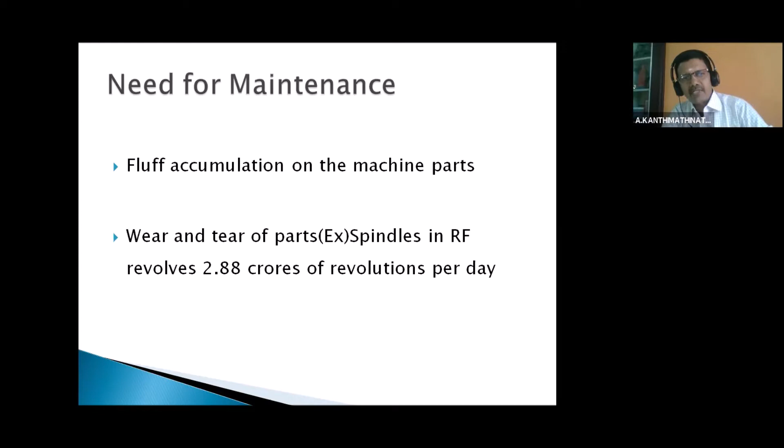For example, a spindle in a ring frame on average revolves more than 2.88 crore revolutions per day. Likewise, the tin roller shaft revolves 21 lakh revolutions per day. Without timely replacement of oil and grease, how can we expect the spindle or tin roller shaft to perform better or without wear and tear?

Likewise, less illuminated areas due to dirt deposits in the sensors and the cameras in contamination clearers will affect the clearing efficiency of these units.

Abnormal heat develops due to dirt accumulation, for example in beater shafts in a blow room. Abnormal energy consumption is created due to hot spots in ring frame motors, and also due to misalignments in ring frame variators.

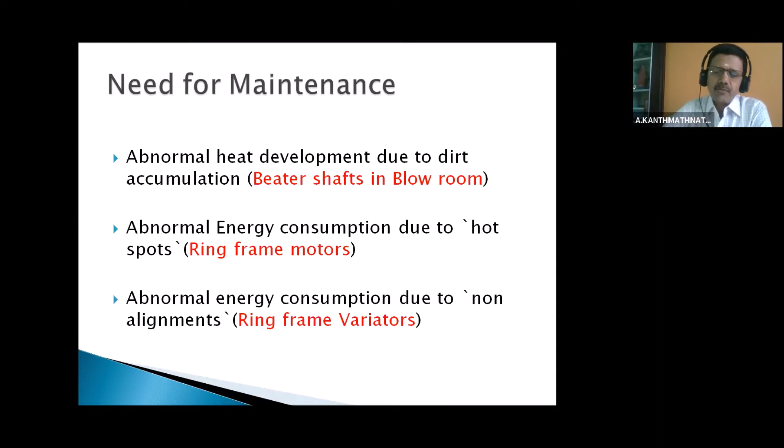All this happens when there is no maintenance. Absence of maintenance results in deterioration of quality, like rise in imperfections or weak places. There is a possibility of drop in production if travelers are not changed in time, possibility of loss in utilization if there is a breakdown, and higher energy consumption when there are hot spots in motor parts.

Why do we say higher maintenance expenditure? For example, if a bearing is not replaced in time, it will eventually wear out. Along with the bearing, you will be replacing the shaft and the housing also. The expenses become threefold instead of a single replacement. So higher maintenance expenditure finally leads to substandard performance.

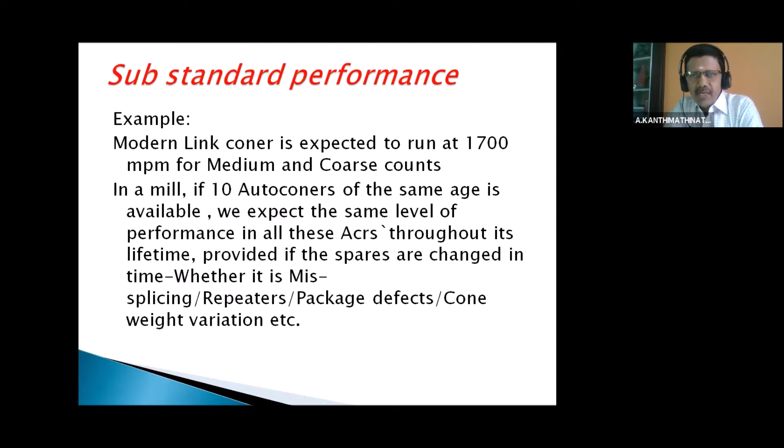What do we mean by substandard performance? If you take an autoconer in any spinning mill, we expect it to run at 1700 meters per minute for medium and coarse counts. Let's assume we have 10 autoconers of the same age. If parts are replaced in time as per the maintenance schedule, we expect all autoconers to perform at the same level. But is this happening in all mills?

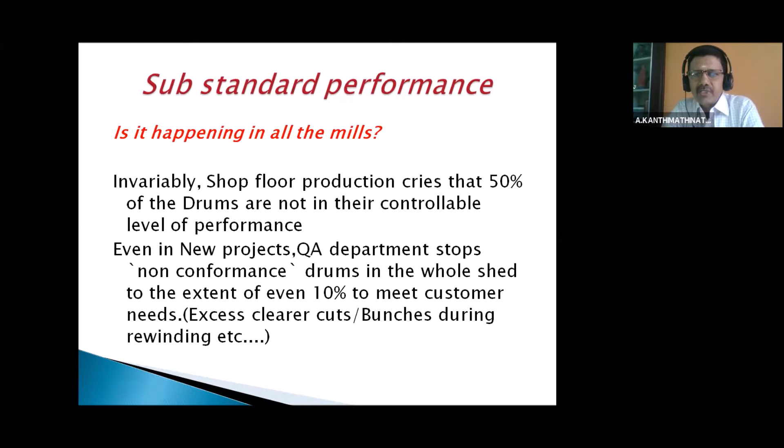Invariably, shop floor production complains that 50% of the drums are not at their controllable level of production. Likewise, even in new projects, QAD stops more than 10% of the drums to meet customer expectations.

Why is this so? The causes can be many, but it is mainly attributed to paying less attention to the needs of the machines, especially replacement, lubrication, or routine cleaning. We also have less knowledge about the machine's requirements, and very few trained crew for attending to them. Finally, it leads to improper maintenance of machinery and its components.

Last but not least, and more important, there is an absence of coordination between the three pillars of manufacturing: production, maintenance, and quality at the shop floor level.

There is an absence of data, absence of review of performance, absence of adequate knowledge to maintain, and non-availability of benchmark levels. We don't know the benchmark levels of performance of an autoconer, a ring frame, or a draw frame. If we take an auto leveler draw frame, we expect 0.5 to 1 meter CV at any point of time. Likewise, we should know where we stand against the benchmark levels of performance.

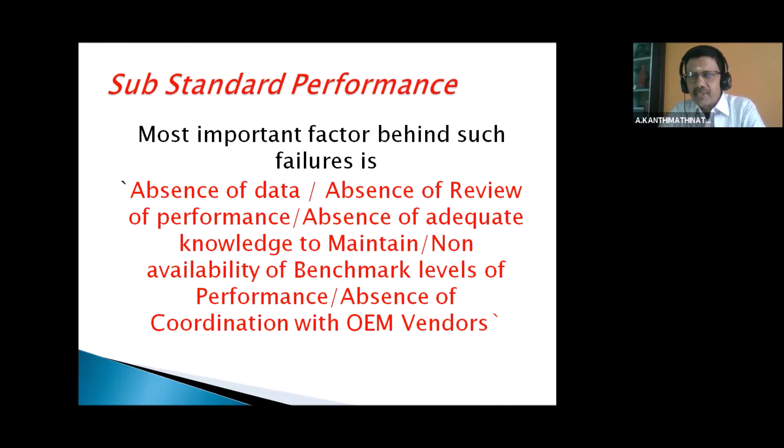And lastly, there is an absence of coordination with OEM vendors. OEM vendors are there to guide us and help us in times of difficulties, but normally we don't coordinate with them.

Now we will look into the evolution of maintenance, which is the topic of this presentation. Let's start with the first generation maintenance, the period of 1940 to 1955. In this period, they allow the machine to run until it fails, and the problem is identified only after leading to a breakdown.

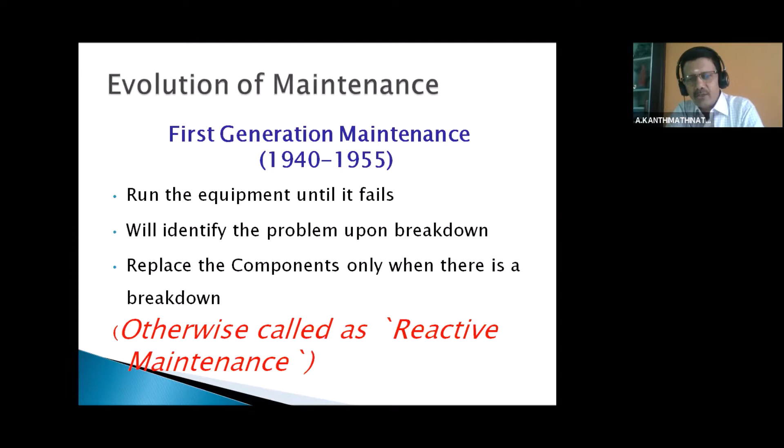Then components are changed only after breakdown. So we normally call this breakdown maintenance, or reactive maintenance, because we are reacting to the incident.

Examples: a tin roller shaft broken in a ring frame, or a differential gear failure in a speed frame. The OEM vendor will be called for inspection, after which spares will be ordered. Upon receipt of the material, the OEM vendor will attend and rectify it. So what is the end result? No one knows when the machine will be restarted.

The best example of this first generation maintenance still happening today is in our ginneries. Double roller gins in Indian ginneries follow this primitive practice even today, which is the root cause for quality inconsistency in our Indian cotton.

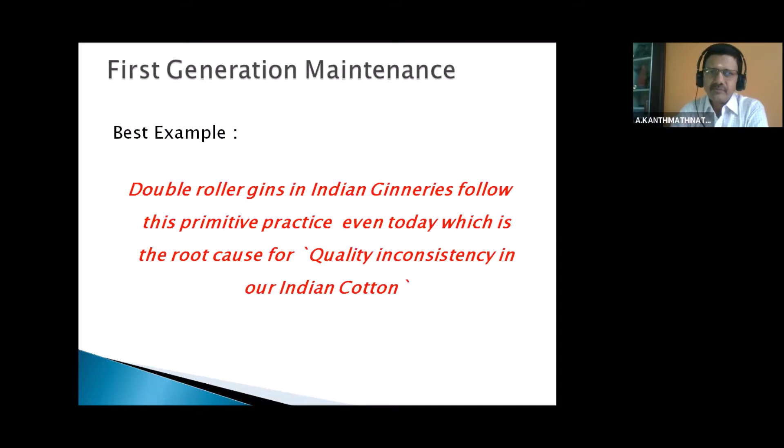So what are the disadvantages of first generation maintenance? Sudden utilization drop of the unit, because no one knows when the breakdown will happen. Surprises to customers, because we don't know when the machine will be restarted or when we can commit to production delivery. Stress in shop floor management, because there will be a quarrel between production and marketing people. There is no fixed time to repair, since we don't know when the OEM vendor will come or when spares will arrive, and there is no room for forecasting the next activity.

Nobody knows what is the next activity for this machine, because we don't know when the machine will be restarted at all. But there is a very good advantage for this program. There need not be any budget for regular maintenance. Management is very happy on that.

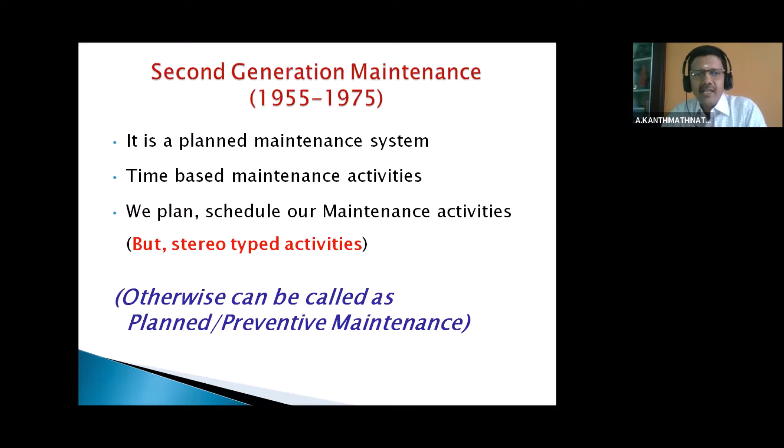Now coming to the second generation maintenance. This period is 1955 to 1975. This is a planned maintenance system, time-based maintenance activities. We plan, we schedule our maintenance activities. But please note, these are all stereotyped activities. Routine machine cleaning, if we fix that ring frame once in 15 days, it will be stereotyped. Once in every 15 days, ring frame number one will go for cleaning. Likewise, we can call it planned and preventive maintenance.

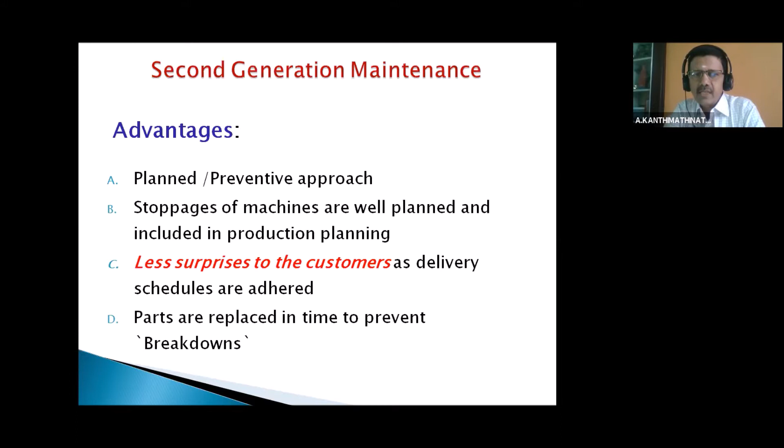Advantages: it's a planned and preventive approach. We take preventive steps to control the breakdown. Stoppages of machines are well planned and included in our production planning itself. At the beginning of the month, the stoppages of ring frames are well planned for maintenance, and the production manager subtracts that portion from the production calculation. We give less surprises to the customers as delivery schedules are adhered to. Parts are replaced in time to prevent breakdowns.

But there is a requirement for second generation maintenance. We should have a planning schedule, a schedule of maintenance activities, and we should control and monitor through our ledgers and records. And we should also review the maintenance activities and their impact.

What do you mean by review of activities? For example, if you do the buffing activity, what should be done? If the buffing is not proper, it will lead to a rise in imperfections. So buffing activity should be checked or reviewed by running the cops in an auto coner clearer and checking for any rise in imperfections. Based on that, the quality of buffing will be reviewed. Like that, for every activity, we should have a system of review of maintenance activities.

We should also have OEM recommendations on lifespan of machinery, lifespan of critical parts, and the lubrication and maintenance schedule. For example, Lakshmi Machine Works will give a schedule of card wire replacement. Cylinder wire should be replaced once in 1000 tons. Rings should be replaced in a ring frame once in 5 years, like that. Likewise, the comber oil changes: every 6 months it should be topped up, every 2 years it should be replaced, like that. OEM recommends for the lubrication also.

We should follow that, and we should also have a skilled and competent maintenance group for taking up the second generation maintenance. We also work with budgets, both regular budget and replacement budget, so management can plan the expenditure for every month. So the second generation maintenance examples are routine maintenance cleaning, machine cleaning, lubrication schedules, resetting of machines, grinding of card wires, top roller cots buffing, spindle centering, CMRS, concentric movement of rings to spindles, and also replacement of critical parts.

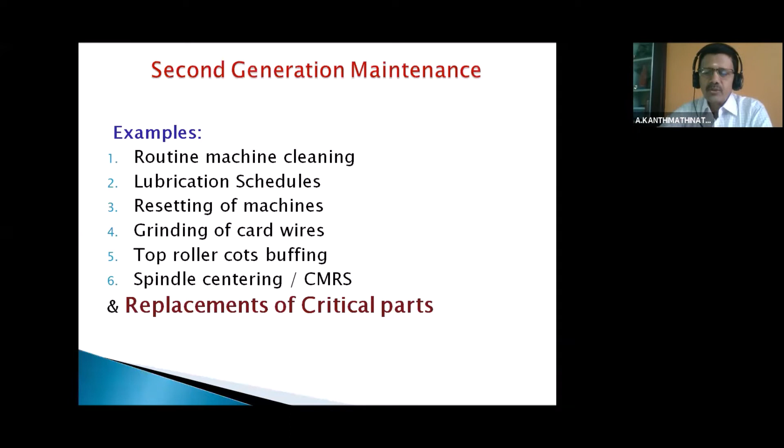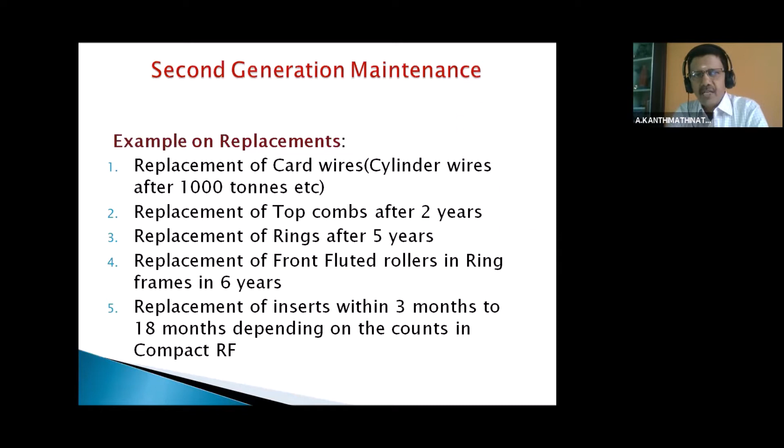What are the examples for replacements? Replacement of card wires, replacement of top combs in a comber after 2 years, replacement of rings after 5 years in a ring frame, replacement of front bottom rollers in ring frames once in 6 years, replacement of inserts within 3 months to 18 months depending on the counts in compact ring frame. These are a few examples of replacements.

What are the advantages of second generation maintenance? It is a well-planned systematic activity. Budgets and control facilitate financial planning for the top management. There are no surprises for the top management. OEM vendors are freed from surprise calls from the mills. Production schedules are met by us. Yarn quality is as planned and agreed for the approved maintenance program.

Please note, yarn quality is as planned only, as planned. For the given maintenance program, for the given replacement program, we can assure this quality. So we are committing to the management as well as the customer that the quality also will be as planned.

OEM vendors, what is the role of OEM vendors? Their role is limited to the maintenance instruction manual, where they give lubrication schedule, maintenance instructions, and the care to be taken for the electrical and electronic parts. Interaction between the cross-functional team in shop floor, production, quality, and maintenance is almost nil, because it is also a stereotyped activity only, and everyone lives in their own islands.

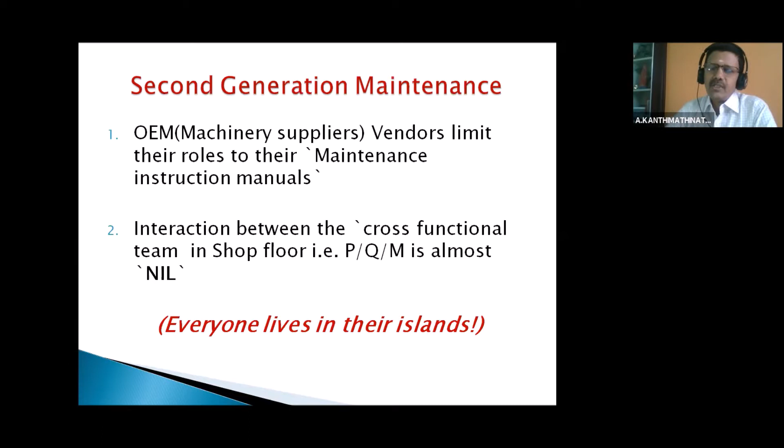In the second generation maintenance, people felt we want to improve the coordination between production, maintenance, and quality on the shop floor. That is why these concepts are generated: total productive maintenance, FMEA (failure mode effect analysis), 5S shop floor excellence, and process and maintenance audit system.

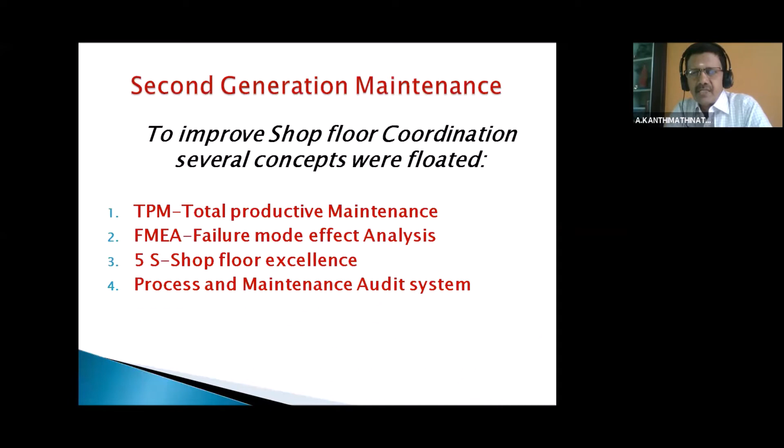What is total productive maintenance system? TPM helps to improve machine design, machine performance, and also the systems in the spinning mills to improve utilization of machinery, increase productivity in kilogram per hour or units per kilogram, and also helps create a safer environment with fail-safe gadgets, in Japanese words called a Pokayoke system. It also helps improve quality and performance of the machines.

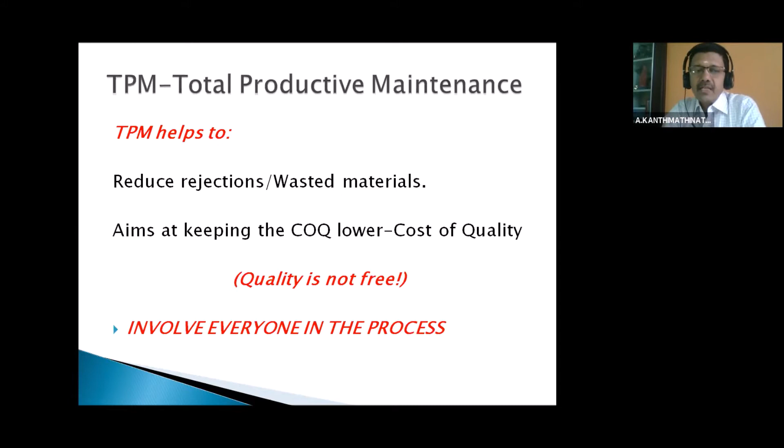TPM also helps reduce rejections and wasted materials in the process. It also aims at keeping the cost of quality lower, meaning manufacturing cost has to be improved, because quality is not free. Just to meet customer requirements, we cannot take the comber noil or flat strips for granted; we have to be very careful of the cost of quality also.

TPM mainly involves everyone in the total process. Main objectives of TPM, in simple words, we can say we are aiming at 0 defects, 0 breakdowns, 0 loss, 0 accidents, and 0 complaints, whether internal or external.

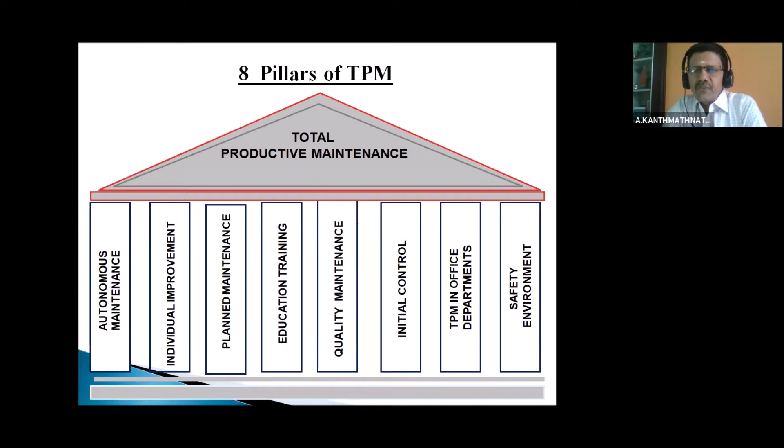So TPM has 8 pillars. What are the 8 pillars? Autonomous maintenance, individual improvement, planned maintenance, education and training, quality maintenance, initial control, office TPM, and safety, health and environment pillar. There are Japanese words for some of the pillars also.

Autonomous maintenance is Jishu Hosen, the JH pillar. Focused improvement is Kobetsu Kaizen, the KK pillar. Planned maintenance is Keikaku Hozen, the KH pillar. Quality maintenance is Quality Hozen, the QH pillar.

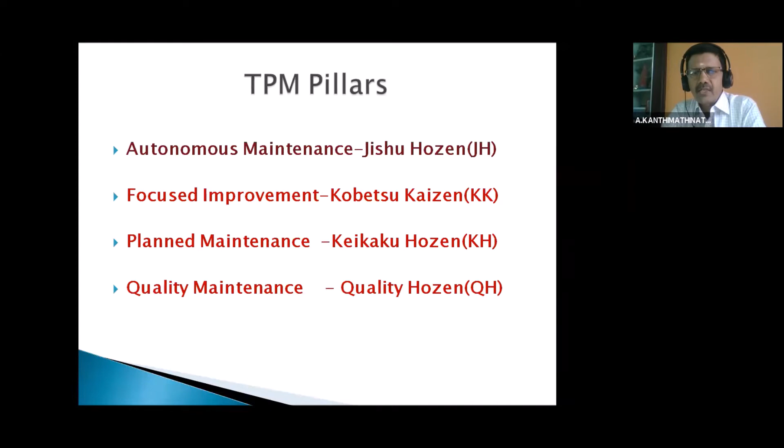Let us see what is done in autonomous maintenance. We will be selecting a machine and then doing an initial cleaning and inspection. Whenever we do cleaning, we always focus on inspection of the machine parts also, trying to locate the origin of defects.

Then we develop tentative standards for every parameter. After that, we follow the general inspection procedure, and also make it autonomous maintenance so that visibility of the parts is improved. Once it is all done, we standardize our operational procedures, and then it becomes autonomous management, where operators will be ready to handle the entire maintenance operation.

For example, some machine will be taken as a model machine and a model team will be formulated. The model machine will be inspected, and we will follow steps 1, 2, 3 as discussed previously. Once completed, we will deploy to other machines.

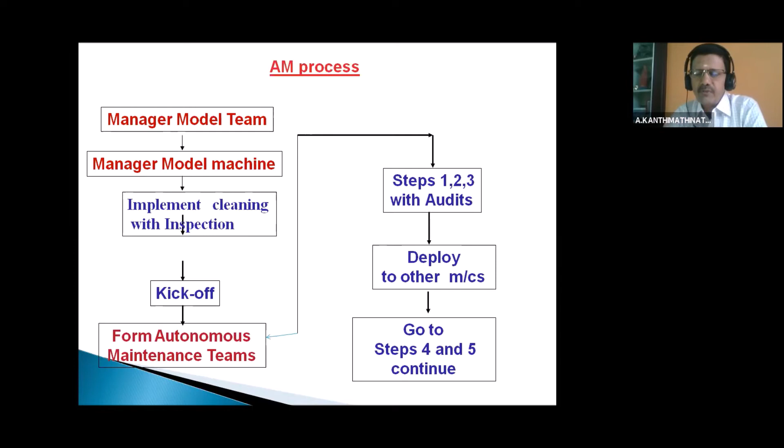For example, if card 1 is selected as a model machine, after completing the SOP, we will implement it in all 24 cards in the department. So every department will go ahead, following with the autonomous maintenance teams. The objective of autonomous maintenance is to make the operator an expert of the equipment and become manager of the equipment.

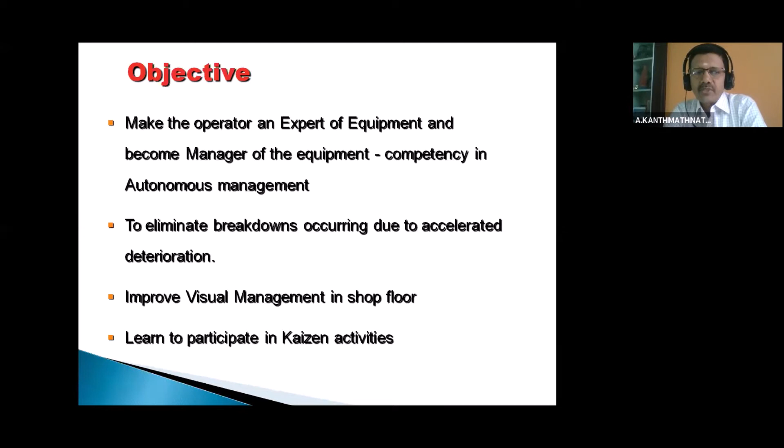He should have competency in autonomous management of the machine. We also try to eliminate breakdowns occurring due to accelerated deterioration, because we are not allowing dust deposits or worn-out parts due to absence of lubrication. We also try to improve visual management on the shop floor, and push operators to learn to participate in Kaizen activities.

What is Kaizen? You can break the word into two parts: Kai stands for small, Zen stands for improvement. Kaizen means small improvements. You might have seen the Maruti Zen vehicle. Maruti is a small vehicle, and Maruti Zen is a small improvement over the Maruti 800. That is why the vehicle is called Zen, a Japanese term meaning a small improvement over the Maruti 800.

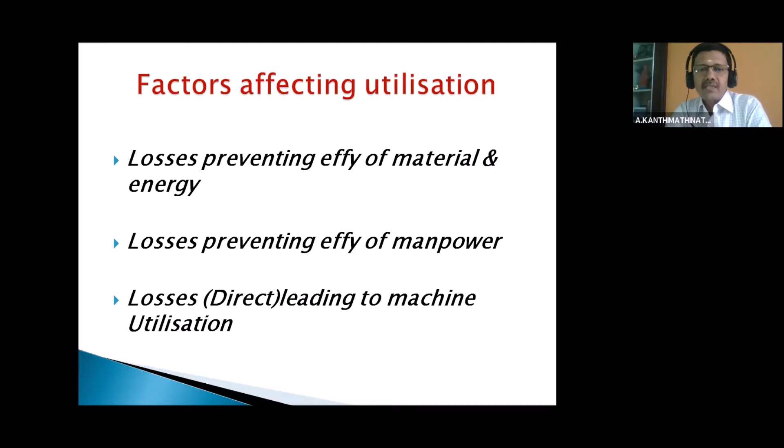Now coming to individual improvement, the KK pillar. Here the pillar focuses on utilization improvement, by reduction of losses and human-related downtime. The main focus is to reduce manufacturing cost due to utilization loss. What are the factors affecting utilization loss? Losses preventing efficiency of material and energy, losses preventing efficiency of manpower itself, and losses directly affecting machine utilization itself.

Here we coin a term called OEE, overall equipment efficiency. This is a simple multiplication factor of utilization, production efficiency, and also rejection, that is 100 minus reject percentage. For example, if your utilization is 97%, your production efficiency is 99%, and you have a 10% rejection, finally it will translate into 86.5 overall equipment efficiency. So this is one example. What is the expected OEE for a spinning mill?

99% utilization, 100% production efficiency, 100% quality efficiency. That means our OEE of a good spinning mill, where the TPM is in control, should be 99.

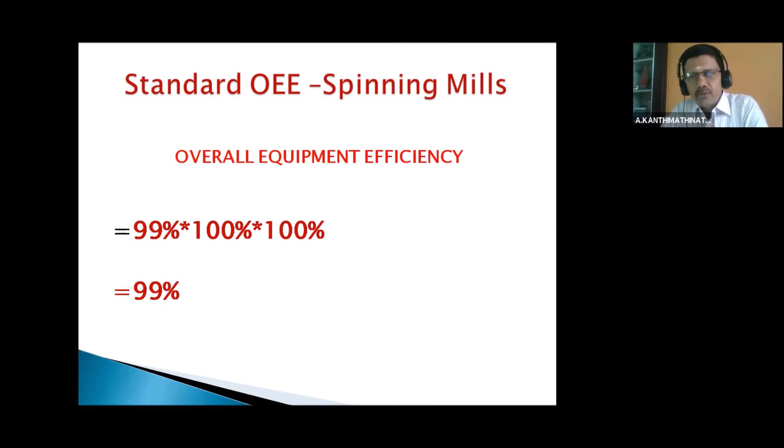Focused attempts should be made to eliminate or reduce all kinds of losses leading to utilization loss of every individual machine in a spinning mill through this pillar.

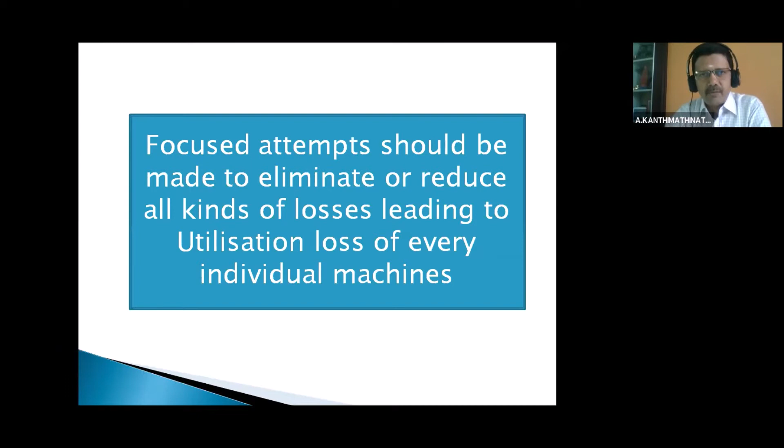The third pillar is planned maintenance. This planned maintenance is to improve the reliability of the equipment, whether we can rely on this machine as a good machine, whether it will continue to run, whether I can commit to the customer by relying on this machine. That is the aim of this planned maintenance.

Here there are 2 important terms, MTBF and MTTR. MTBF is mean time between failure, MTTR is mean time to repair. How are we achieving that? We are trying to achieve 0 equipment failures through establishing the basic condition of the machines.

So basic condition, what do you mean by basic condition? When the machines are sold, it comes with a certain condition. The same condition has to be maintained throughout its lifetime. That is called basic condition. So we should eliminate causes or factors for accelerated deterioration, and abolish environments causing accelerated deterioration.

For example, in a ring frame inverter, there is a cooling arrangement for the ring frame main drive inverter. If the inverter cooling arrangement is not working, the inverter fails within 24 hours. So you should maintain such kind of environments, abolish environments causing accelerated deterioration.

And you should correct design weakness and lengthen the life of any parts. For example, when Suessen gives a retrofitting for G5 for one ring frame in spinning mills, in many spinning mills, the front roller shaft immediately breaks down after the retrofitting.

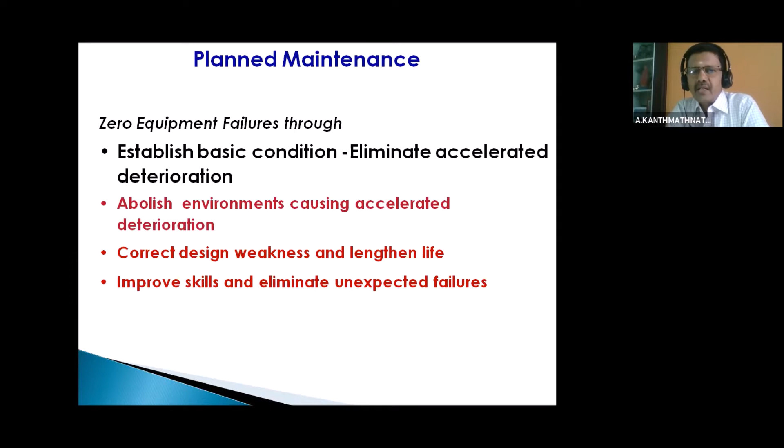The mean time between repair, MTBR. So we should study the time taken between the repairs in a particular machine. For example, in a ring frame variator failure in a particular ring frame. So any breakdown, it should be prolonged. Actually, there should be a time gap between the breakdowns.

There should not be any breakdown at all. If there is a breakdown, it should not recur so fast. So that should be studied between the frames.

For example, ring frame 1, if the mean time between repair is 6 months, that should be maintained in other frames also. If the second ring frame breaks down within 3 months, we should study and improve the condition there. So finally, the time taken for mean time between repairs should be extended so that the utilization loss is minimized. Likewise, mean time to repair.

This is one of the most important factors which I want to highlight also. In one spinning mill where TPM is implemented, there was a unilab breakdown in the day shift. That unilab was rectified immediately within half an hour. The same kind of breakdown repeated in the third shift in the same mill after 1 week's time. For the same repair, the mill took 3.5 hours.

So what do you mean by this 3.5 hours? Half an hour and 3.5 hours - there is a 7 times stoppage of the machine. So this has been studied by the mill in the TPM procedure.

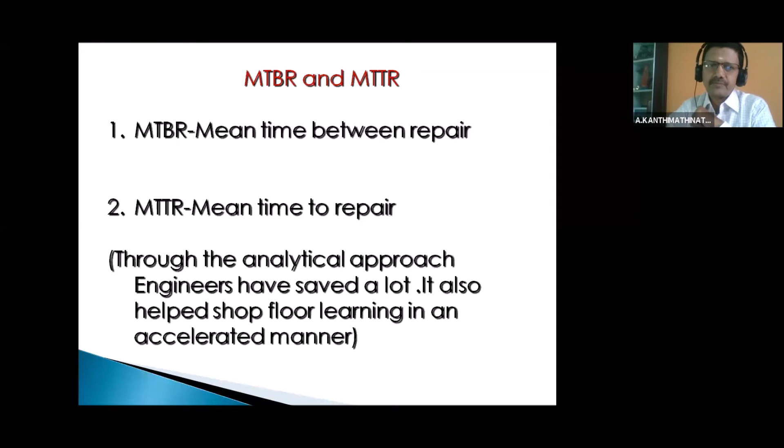Objectives of this education and training pillar, normally called the E&T pillar. Here we have to eliminate breakdowns due to poor skill or competence of the staff or maintenance crew, and to eliminate operator mistakes leading to customer complaints, defects and accidents.

In TPM based mills, customer complaint fabrics or cones will be taken to the work spot and discussed with the operators themselves, because operators are always with the machine and know how defects are being produced. So we should involve them, educate them, and get trained from them also. We should develop multi-skill in operatives, improve the skills of the maintenance personnel, and finally achieve zero non-conformance due to lack of skill. That is the aim of the education and training pillar.

The workers must be able to detect and eliminate abnormality by seeing the conditions itself, and they should be able to do Kaizen by making small suggestions, such as reducing cop rejection or reducing package defects. And we should develop multi-skill.

For example, today all the mills are going for individual spindle monitoring systems and also using e-bike. So operators must be able to read the content in a dashboard, reading the dashboard content in the e-bike also. So it's a multi-skill operation today. They should be educated on the computer display and act on that.

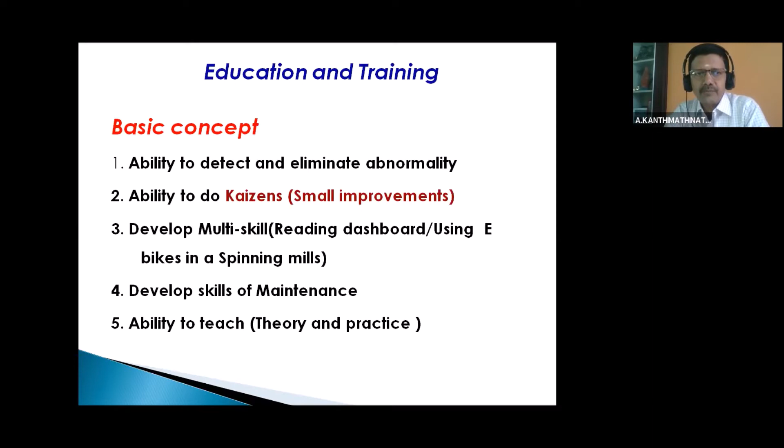Next comes the quality maintenance pillar, the fifth pillar. Here we are trying to simulate 100% inspection. Almost all of you will accept that 100% inspection of the product is not at all possible in a spinning mill, because every day some mills will be running with 25 tons of production. So it's not at all possible to spend time on that. However, we should try to simulate conditions of 100% inspection, like building quality into the products in the in-process. That is, we have to eliminate in-process defects.

For example, if the customer is very serious about plus 140% imperfections, then we should be very cautious on the Comber NEPS delivered in the sliver. Like that, you should set standards for the Comber NEPS itself for the customer requirements. And we should try to eliminate customer complaints of all sorts, whether internal or external. We should also aim at reducing cost of quality through elimination of defects and rework.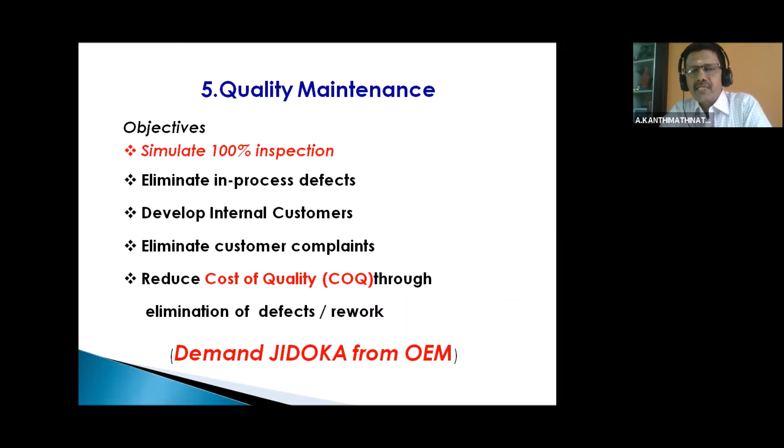And also we should demand JIDOKA from OEM vendors. What is JIDOKA? JIDOKA is nothing but automatic detection of errors and defects in the process. For example, seat belt alert in a car - if you don't wear a seat belt, it may lead to accidents, or rather, when the accident happens you will be affected more. So when the car is started it will give you an alarm signal, a seatbelt alert. This is called JIDOKA.

Likewise, alerts when handbrakes are not released while we start the machine. Likewise, slip spindles in an individual spindle monitoring system, because slip spindles lead to quality defects. Alarm generation in modern clearers when the clearer cuts are more or cop rejections are more. Alerts generated by individual spindle monitoring systems on broken spindles in a ring frame - these are all coming as JIDOKA. You should ask for JIDOKA from the OEM vendors.

How will we concentrate on ZDQC, zero defect quality control? You should concentrate on the origin of the quality defect. When you know the origin of the quality defect, you will establish material conditions yielding zero defects. How will you establish this? For example, you are working on contaminations in a fabric, so you will see that cotton is purchased with lesser contamination. So establish equipment conditions yielding zero defects.

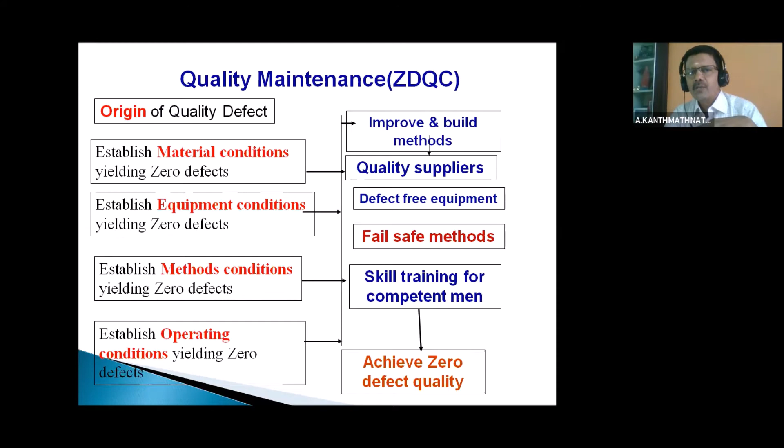Then establish methods conditions yielding zero defects - what are the methods? How do you clear the contamination, what methods are being followed by the worker? Then establish operating conditions yielding zero defects - what is the operating condition? Maintaining RH level in the autoconer section. If you don't keep 65% RH, your clearer is not going to function. So the operating conditions in the autoconer department has to be maintained like that. Based on this, we have to achieve zero defect quality.

Then comes our initial control activities.

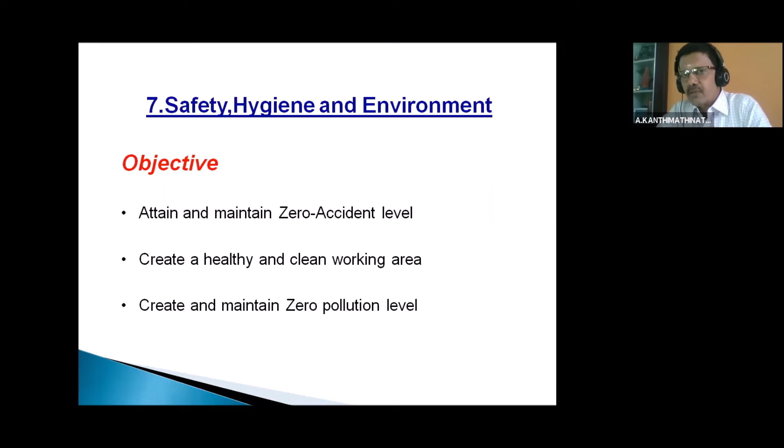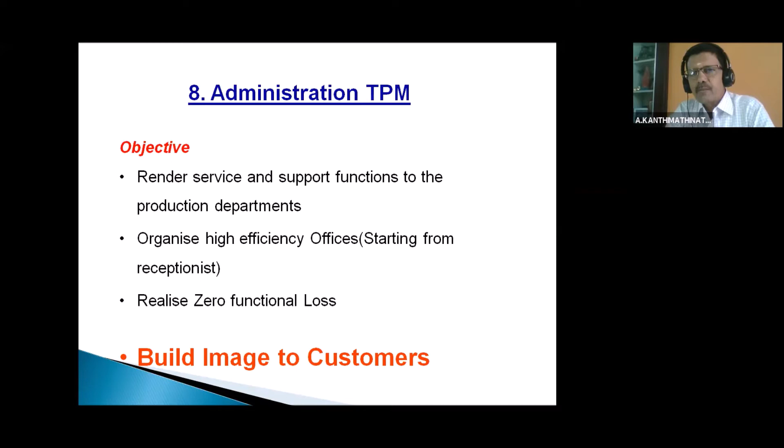Then comes the administration TPM. Administration TPM is being taken lightly in most of the mills, but it is more important because HR also comes under administration TPM, where 5S is a major part, and also the attendance, the time taken to pass the bills, time taken to receive a guest, everything, communication improvement. So if the administration TPM is not proper, the image at the customer level will be spoiled.

Benefits of TPM: total productive maintenance helps to maximize utilization efficiency, improve machine productivity, improve machine design, reduce rejects, and finally it helps to involve everyone from the operatives to the GM level.

Next technology concept is FMEA, failure mode effect analysis. FMEA was first coined by aerospace, used in 1960 itself. It was widely used by the automobile industry globally, first promoted by Ford at the global level. In 1990, the garment industry got attracted by FMEA and started introducing that. After that, spinning mills slowly followed the garment industry from the 1990s on FMEA.

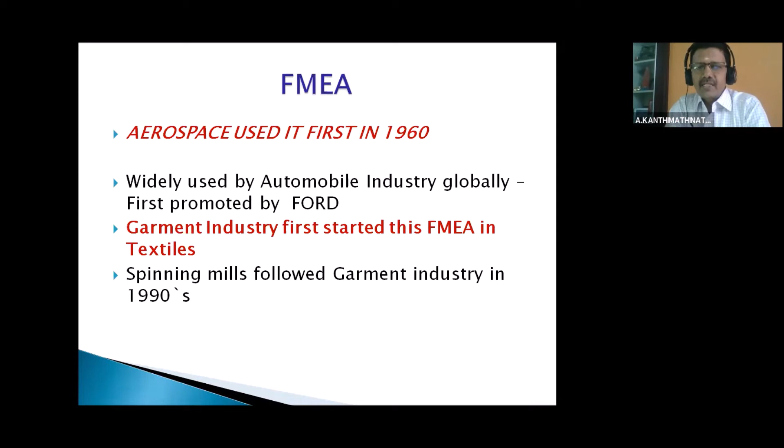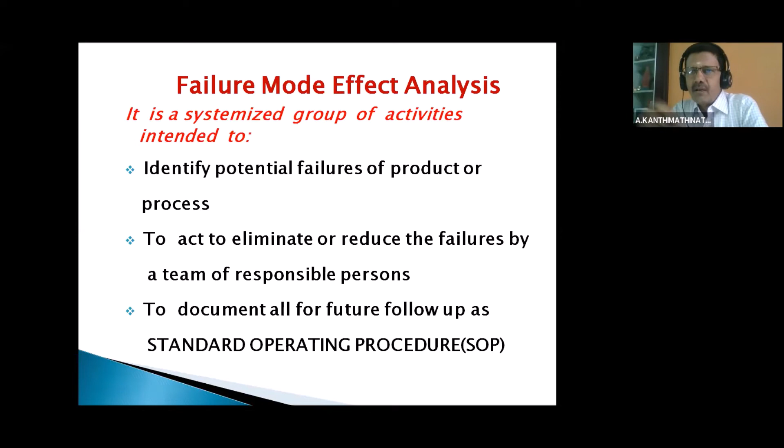What is FMEA? It is a systemized group of activities intended to identify the potential failures of a product or process, inherent in the process. Then we will have the responsible person act to eliminate or reduce the failures or the impact of failures, through a team of responsible persons. Finally, to document all these activities as standard operating procedures.

For example, we will take contamination in finished fabric. Customer has complained, their expectation is 0.5 contamination per 20 kg of fabric. So what are the things to be done? What are the data to be collected?

Contamination cotton, contamination picking efficiency by the operators, ejections per hour in a contamination cleaner in blow room, clearing efficiency in that machine, then autoconer settings per clearing, autoconer clearing efficiency, then contamination per kg in gray knitted fabric, contamination per kg in bleached fabric, and contamination per kg in dyed fabric. All this forms the data for the FMEA.

Then who are all the responsible persons for this? Since cotton contamination is to be noted, the procurement in-charge is responsible. Then the QA in-charge is responsible for contamination data in the department. The training in-charge is responsible for the methods in the contamination picking area. The maintenance in-charge is responsible for the contamination cleaner setting and the autoconer setting.

So all these persons will be called together to discuss this subject, and they will try to form a strategy to improve contamination clearing efficiency, and finally to reduce contamination in the final fabric. So they will implement the action, review the action taken, and go on reviewing the action by assessing the final finished fabric.

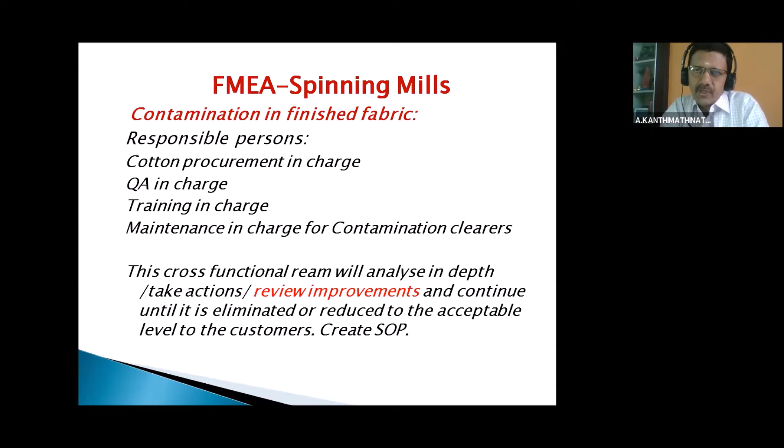Likewise, FMEA for process or design can be done in a spinning mill. The best example of design FMEA by OEM vendors with spinning mills is Contra flat tops by Lakshmi Card Clothing, and also the geometric conversion, normally called the short stitch conversion, for compact spinning by LMW. So you know the Contra tops.

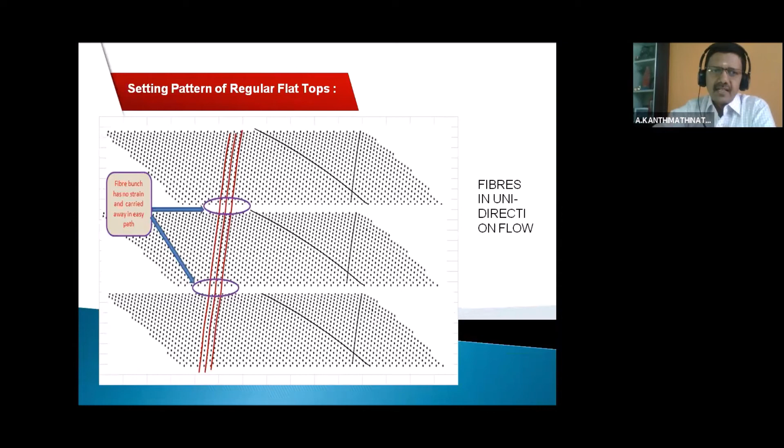In the normal flat tops, regular flat tops, fiber moves in a straight line.

Whereas in the Contra flat tops, fiber is allowed to move in a zigzag way by arranging the flats in a zigzag way. That is, right helix angle and left helix angle will be alternatively placed in the flat tops, so that it helps.

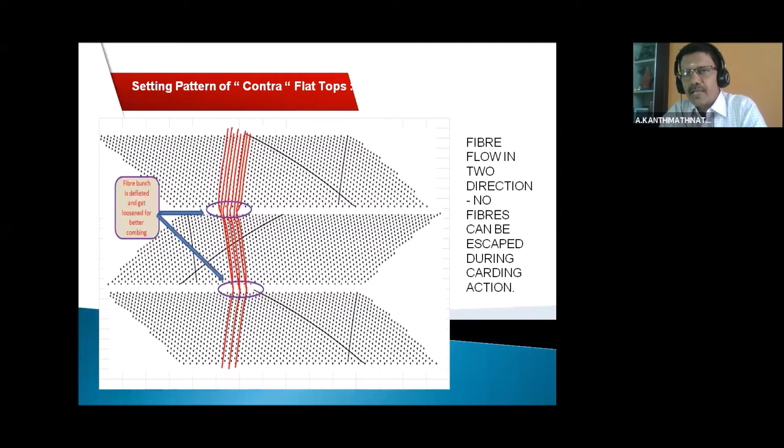What are the advantages? Enhanced fiber separation between cylinder and flat tops, significant reduction in sliver neps per gram. More importantly, you are saving minimum 0.5% raw material, maximum of 1%. So the flat tops will be paid back within a 3 month period. This is an advantage of design FMEA by LCC.

So in the FMEA, we also go by RPN, risk priority number, which is calculated from occurrence of the defect, severity of the defect, and detection ability of the defect. Based on these 3 factors, we are trying to create RPN also.

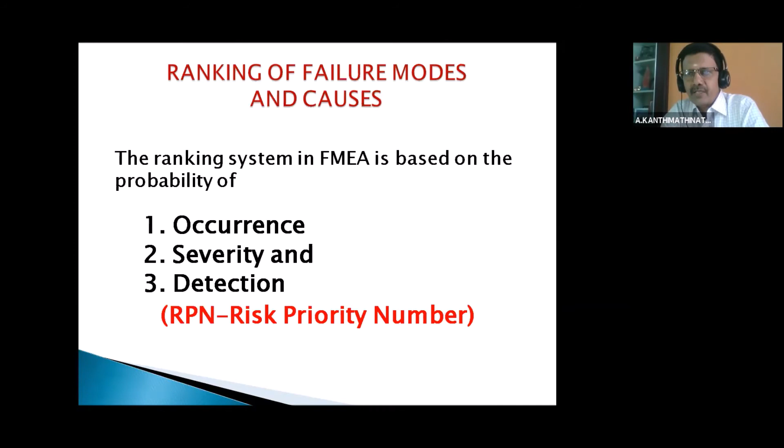So what are the advantages? We are developing a cross-functional team. We are able to eliminate the potential causes. We are able to develop standard operating procedures. We are able to develop problem response plans. We are able to develop good customer vendor rapport.

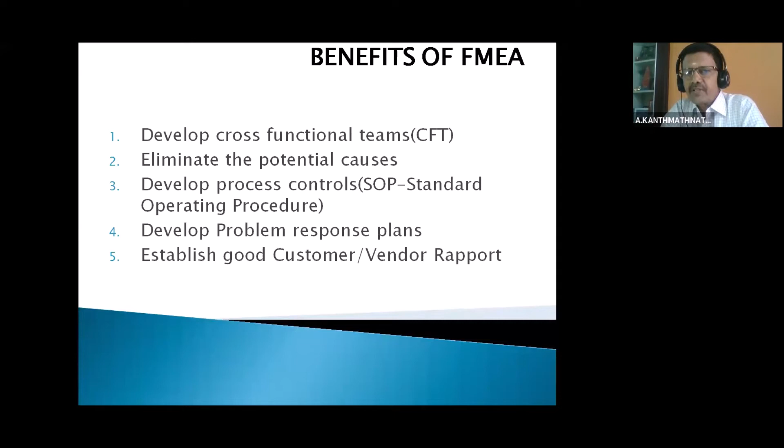So 5S, I don't want to dwell more time on this because all of you are aware: SEIRI is sorting, SEITON is for orderly arrangement, SEISO for cleanliness with inspection, SEIKETSU for standardization, SHITSUKE for assigning the responsibility for sustainability, which almost all the mills are aware about.

Then comes the machinery maintenance audit system, the 4th one. This is internal or external audit system on mills. Maintenance management system helps to unearth the deviation in schedules within the mills against recommendation by OEM.

Wear and tear of parts can be identified. Based on the wear and tear of parts, adequacy of maintenance schedule and lubrication schedule will be identified. Yarn quality level and consistency will be studied, so that impact from improper maintenance can be assessed. Quality of tools and gauges will be studied by the auditing team, and we will also try to use advanced techniques of machine auditing, like thermography and air leakage detector, etc.

Going to the third generation maintenance. Third generation maintenance is 1975 to 2000. This is nothing but predictive maintenance.

So how do you do that? This is condition-based maintenance. Only based on the condition, maintenance operation will be done. So mostly we are able to do this with the help of computers during this period.

We also work towards multi-skilling of the workforce, and teamwork is a result of this. And we go by a proactive approach in these maintenance systems.

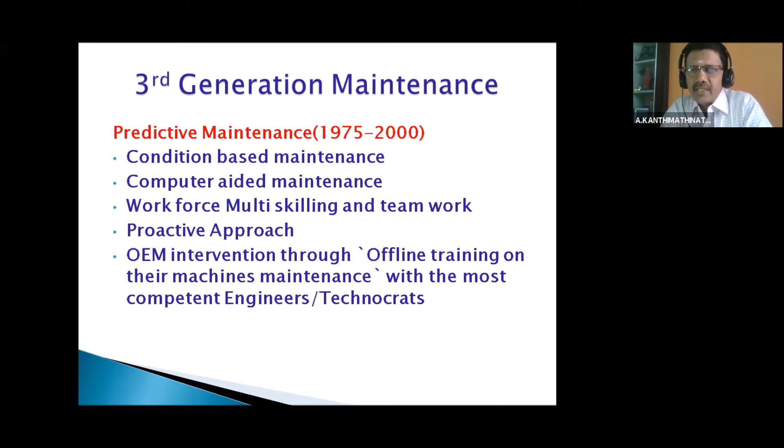Here, OEM intervention, apart from instruction manuals, offline training and on-site maintenance, happens with the most competent engineers and technocrats, whether it's LMW or Truetzschler or Rieter, in the factory itself, so that people are aware of the machines and their condition, and how to approach condition-based maintenance.

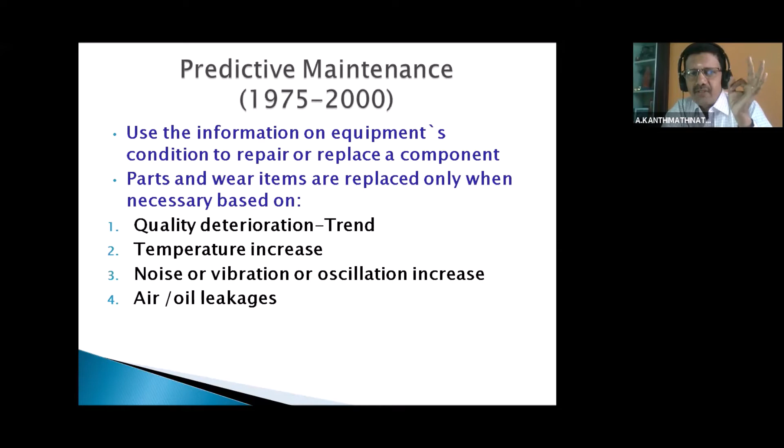Use the information on equipment's condition to repair or replace a component. Parts and wear items are replaced only when necessary, based on quality deterioration, temperature increase, noise or vibration increase, or air or oil leakages. These are 4 factors.

What are the advantages? Maintenance cost can be reduced because it is not stereotyped. Each plant can modify their maintenance practices based on the environmental condition. For example, in a seashore mill, rings will be spoiled more often, like that.

Machine learning is a boon to shop floor technicians. Shop floor technicians are being trained by the OEM vendors at the factory level.

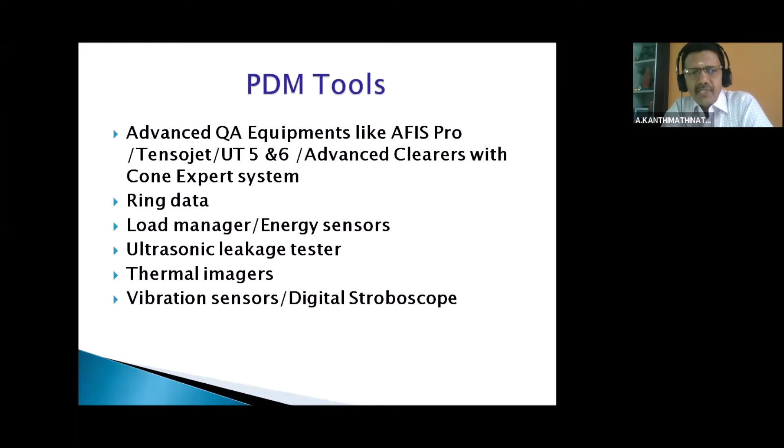For example, what are the PDM tools? When you say predictive maintenance tools, what are they? Advanced QA equipment like USTER AFIS Pro, Tensojet, UT5 and UT6, advanced clearer with Cone Expert system, ring data, load manager and energy sensor, ultrasonic leakage detector, thermal imaging, vibration sensor, digital stroboscope.

How do we do that? The AFIS instrument is used to predict the life of card wires. Today, card wires are not replaced in a stereotyped way, not based on 800 tons.

It is based on nep level and also the nep removal efficiency in the card. Mills have even doubled the life of card cylinder wires, even up to 2000 tons in some mills. Advanced clearers help to track CVF imperfections from the ring frame, and the card's grinding cycle can be extended based on that.

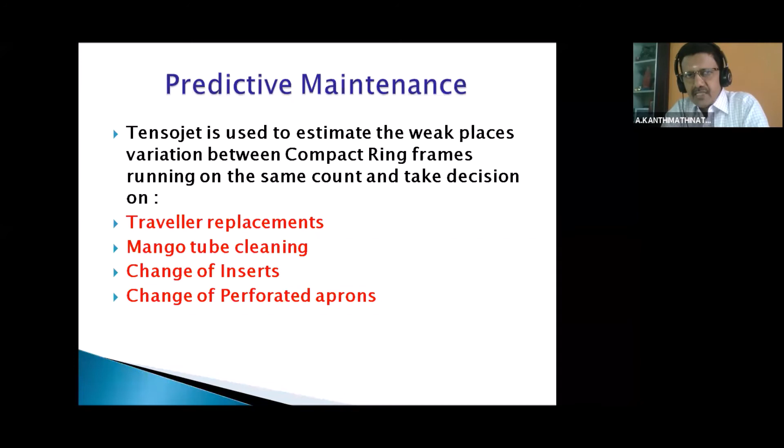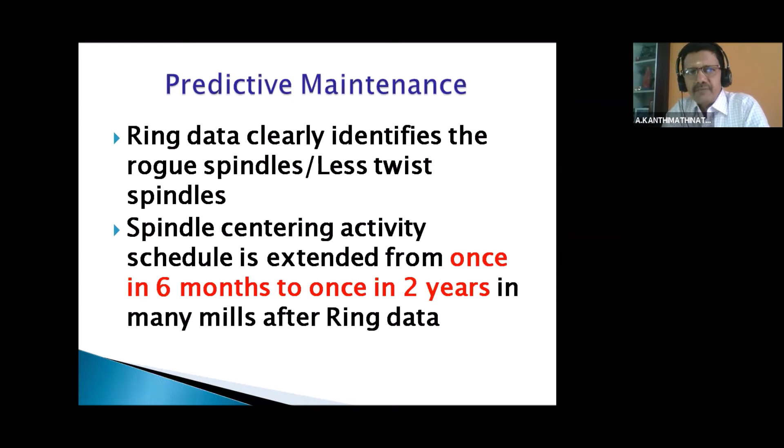Ring data clearly identifies the rogue spindles, less twist spindles, so that the tape schedule can be modified. Spindle centering activity schedule is extended from once in 6 months to once in 2 years in many mills after ring data implementation. Load manager, how is it being used?

These are used to estimate the energy consumption in ring frames, and suitable action for lubrication or parts replacement is done, for example, top roller bearing replacement. Air leakage detectors are used to test leakages in autocones, and multi-jet valves or splicer gaskets are replaced before it starts affecting the product quality.

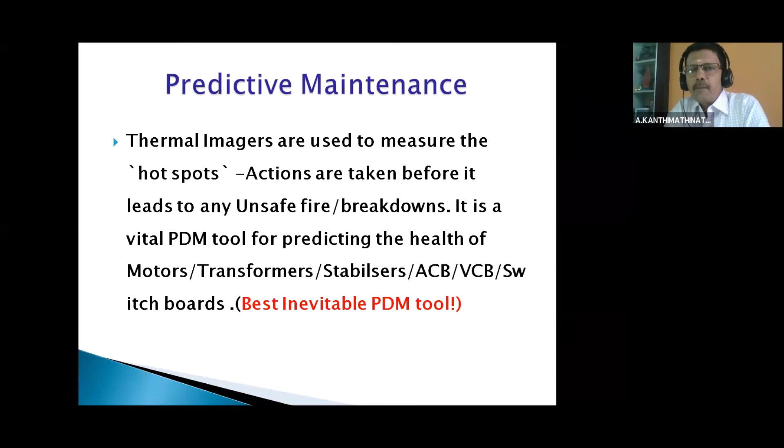Thermal imagers are used to measure the hot spots in motors or control panels. Actions are taken before it leads to any unsafe fire accidents. It is a vital PDM tool for predicting the health of motors, transformers, stabilizers, ACB, VCB, switchboards. Best inevitable PDM tool in the mills.

Now, we also have an extension of third generation maintenance called smart predictive maintenance, SPDM. Beyond 2010, IoT enabled devices helped a lot to work for real-time measurement of conditions of machinery. In the previous slide, we were discussing measuring offline. For example, thermal imagers help measure temperature once in a period of 3 months, or once a month. Here, real-time measurement is possible. That's what SPDM tools do.

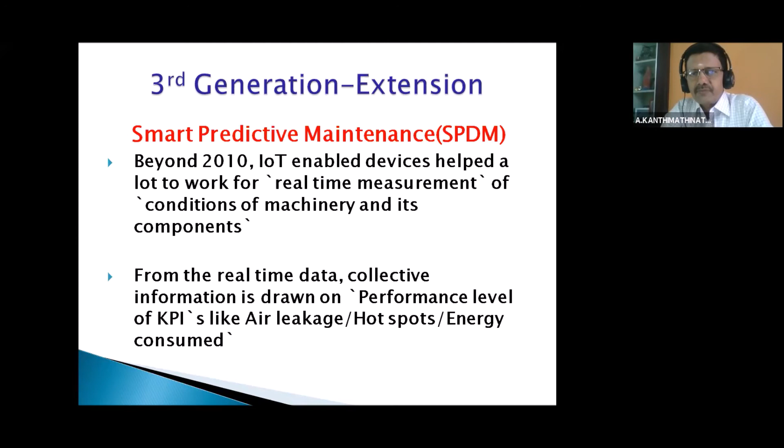From the real-time data, collective information is drawn on performance levels of KPIs like air leakage, hotspots like temperature of a motor, temperature of AWS motor, energy consumed - everything is recorded throughout the 24 hours. Based on the real-time data, we get the health of the asset. Performance metrics are established and alerts are built in to stop the machines if the limits are exceeded. A range in performance parameters can also be built in.

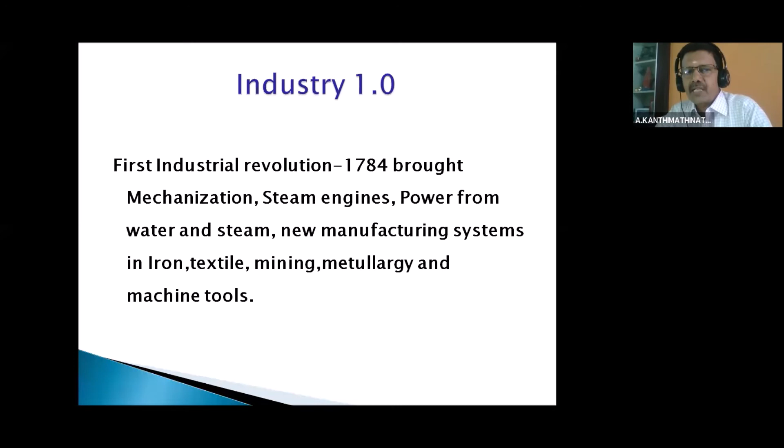Now, before going further, let us dwell upon the industrial revolutions. Industrial Revolution 1 started in 1784, which brought mechanization, steam engines, power from water and steam, new manufacturing systems in iron, textile, mining, metallurgy, and machine tools. This is 1784. The second revolution starts in 1870.

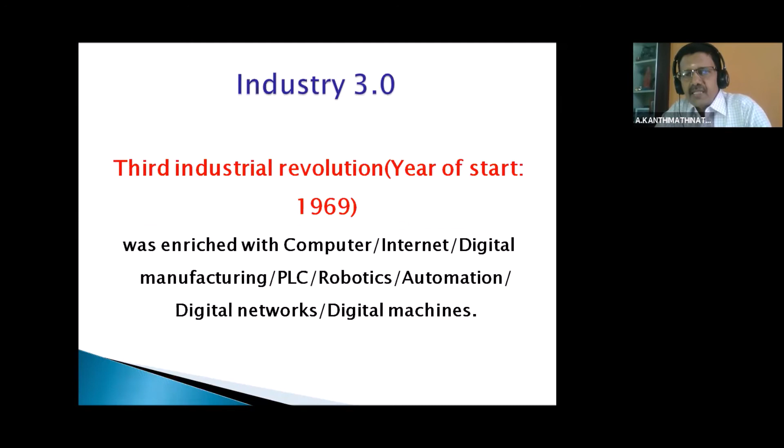The third industrial revolution is 1969. It is enriched with computers, internet, digital manufacturing, PLC, robotics, automation, digital networks, and digital machines. Best examples in spinning mills are of industrial revolution three.

Blendomat, Contifeed, auto levelers and auto can changers in draw frames, auto doffers in ring frame and autoconers, auto splicers, advanced clearers, link coners, auto piecers in open-end spinning - it's an example of industry 3.

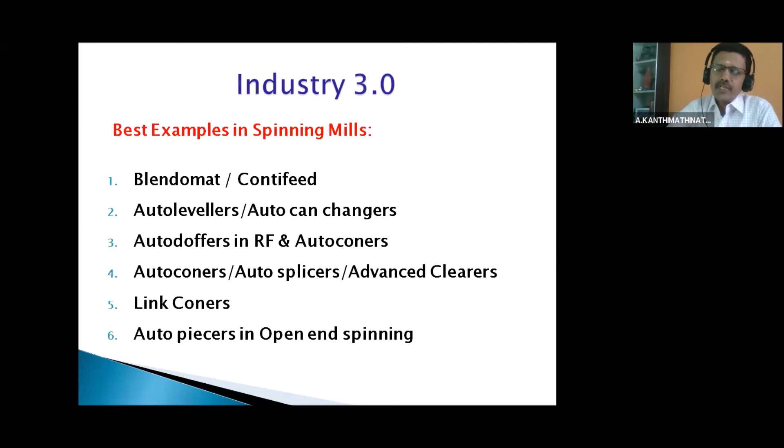The last one is industry 4, fourth industrial revolution, where we are looking at it. The year of start is 2011. Here, there is a merger of information technology and operation technology. We call it a convergence of IT and OT, simply called IoT also.

And we are looking at autonomous machines, that is, we don't like to have human intervention. We are focusing on less human intervention, and we are trying to use advanced robotics in all operations. And we use cloud data, Internet of Things, smart factory programs, and the platform is always artificial intelligence in Industry 4. What are the goals of Industry 4?

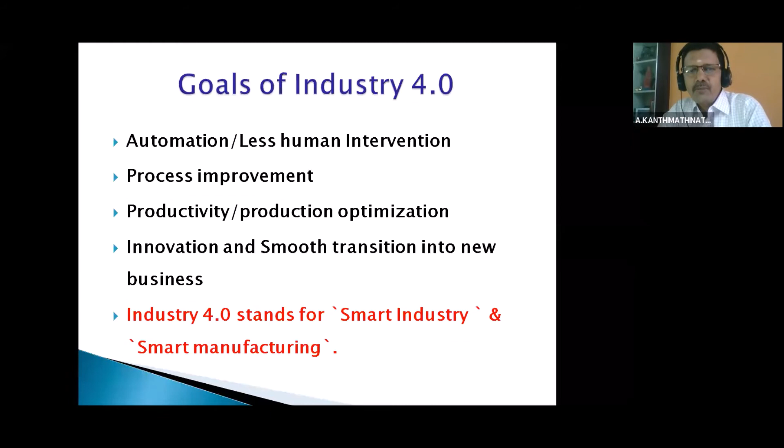Mainly automation, less human intervention because human power is costly today, and process improvement should be made automatic - productivity and production optimization. If the machine is capable of running at 25,000 and delivering 25 kg per day, we should get the maximum output from that particular machine. And innovation and smooth transition to new business. Industry 4 stands for smart industry and smart manufacturing.

Industry 4 in spinning mills - what are they? Advanced clearers with smart clearing curve. After the invention of the smart clearing curve in advanced clearers, do you see there is a role of any QA manager or quality experts in the QA department? Today, even an operative can go and set the machine based on the fabric expected requirements translated into a clearing curve. That's a very simple process today.

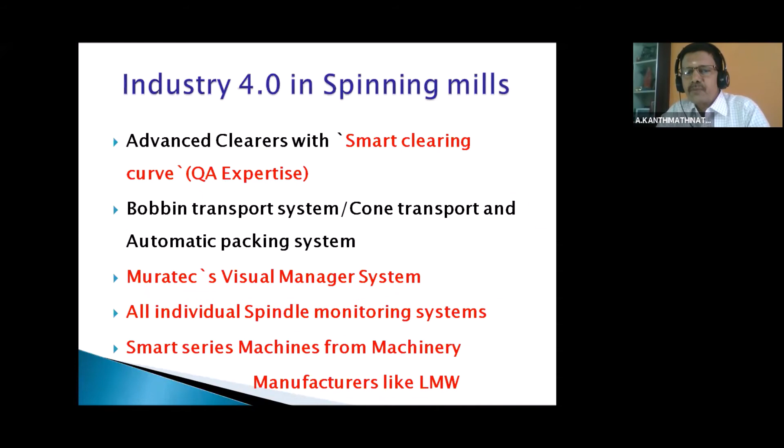And then bobbin transport system. The production planning itself is well organized with the help of the bobbin transport system and the cone transport system. Muratec's visual manager system is a boon for Industry 4 in spinning mills today. All individual spindle monitoring systems come under Industry 4. Smart series machine from LMW, smart series machine, for example, LRJ 9SXL.

LRJ 9SXL from ring frame. LMW has sensors for energy consumption and air consumption to capture real-time data, supplied along with the machine itself.

Spindle ID, that is spindle identification system, autoconers, identifies the rogue spindles in ring frames so that we can correct the same immediately. Now we have individual spindle monitoring system which helps spinners identify rogue spindles.

Real-time data helps immediate actions, and machines are not stopped unnecessarily for spindle centering, top arm corrections, or mango tube correction, all of which help improve ring frame utilization to 99.2% today. In mills where ISM is installed, mills are getting 99.2% utilization. When you say OEE as 99, today you can set the standard at 99.2.

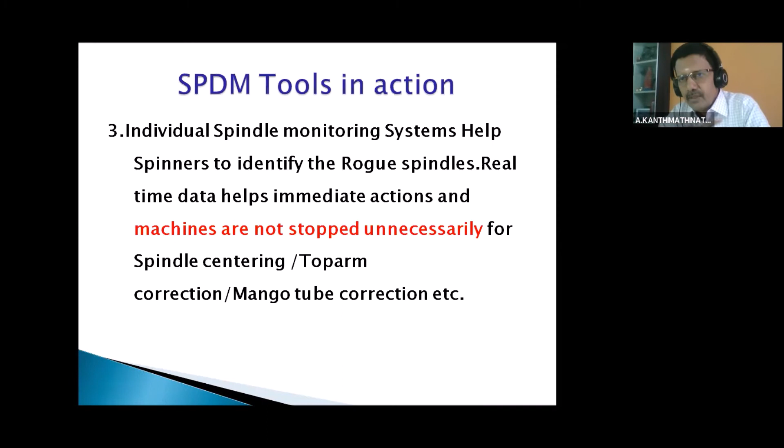Health monitor in SpinConnect of LMW. Customized solutions from LMW for SPDM tools for critical zones like ring frame motor, Comber headstock, are also available. Energy, temperature, and vibration levels can be measured, and the health of the machine is monitored 24 hours, which helps for predictive maintenance. You can set standards also.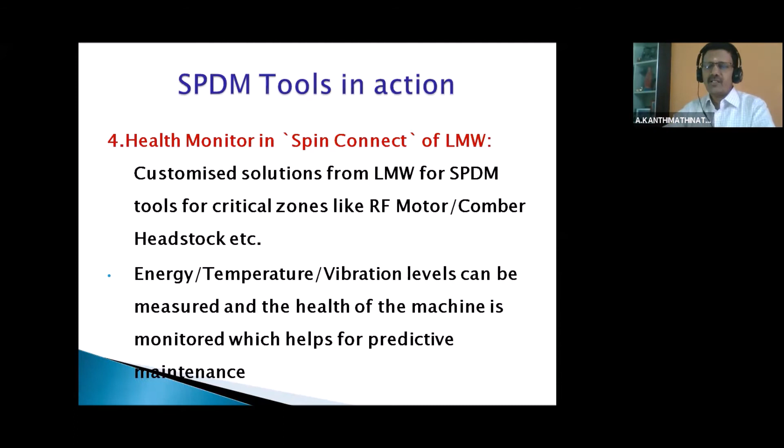Performance metrics for temperature and vibration level. Then comes Uster, a total testing center which identifies the history of rogue spindles in conjunction with Uster Sentinel and UQ for clearance. This helps improve ring frame performance from the clearer function itself.

And then Spin Connect, which connects critical zones for real-time data, raises alerts, and provides reports. We can make it tailor-made for all spinning machines and utility equipment, including AWES or humidification plants.

What are the recommended SPDM tools? Thermal sensors for AWES, that is automatic waste evacuation centrifugal motors, ring frame main motors, VCB, ACB, and compressors. Ultrasonic vibration sensors for ring frame motors, Comber headstock, humidity plant motors, and AWES centrifugal fan motors.

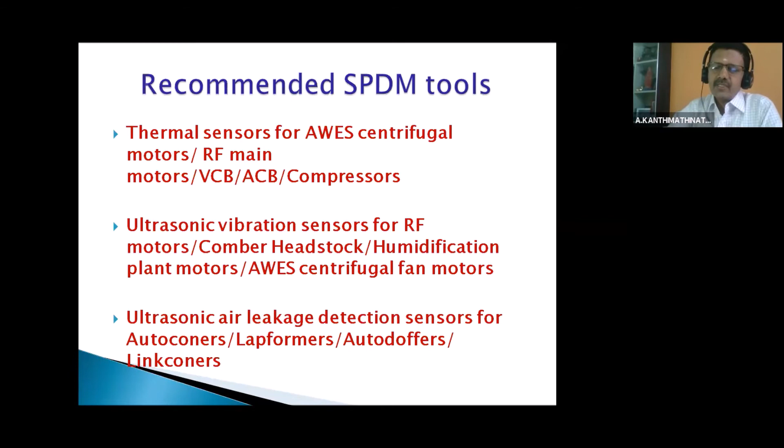Ultrasonic air leakage detection sensors for autoconers, lap formers, autodoffers, and Linkconers. These are the SPDM tools we can think of so that we can get real-time data.

Further to that, humidity sensors after eliminators in humidity plants, energy sensors in critical zones like ring frames, autoconers, humidity plants, compressors, and AWES centrifugal fan motors.

Most mills don't even have power consumption standards today. Based on your spin plan, your allocation of machinery, and your allocated utilization status, the mill should know what the power consumption standard is, and from that level, whether you are achieving the standards. So the energy sensor will help you tap the data on that.

Benefits of the SPDM tool: we get real-time data on hotspots, air leakage, energy consumption, vibration level, and reduced air saturation efficiency from the humidity plants. With the use of IoT-enabled devices as above, maintenance management becomes smart with a lot of focused activity.

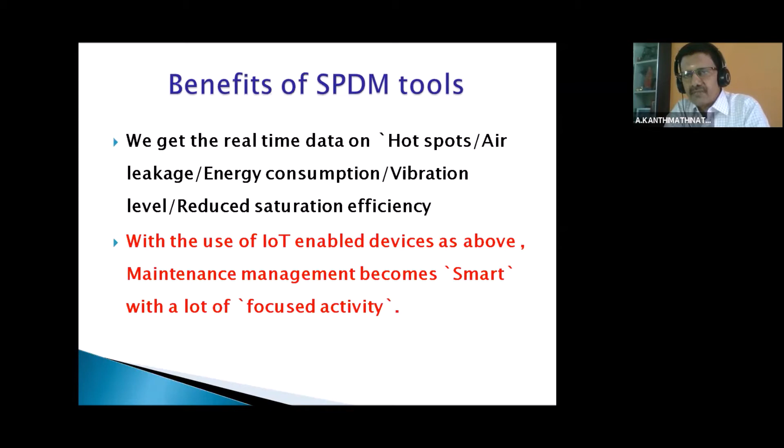Now, coming to fourth generation maintenance. This is quite an interesting program: SPMF, Smart Prescriptive Maintenance Framework. Why we call it a framework, we will come to later. This is something we have been able to do from 2017 onward.

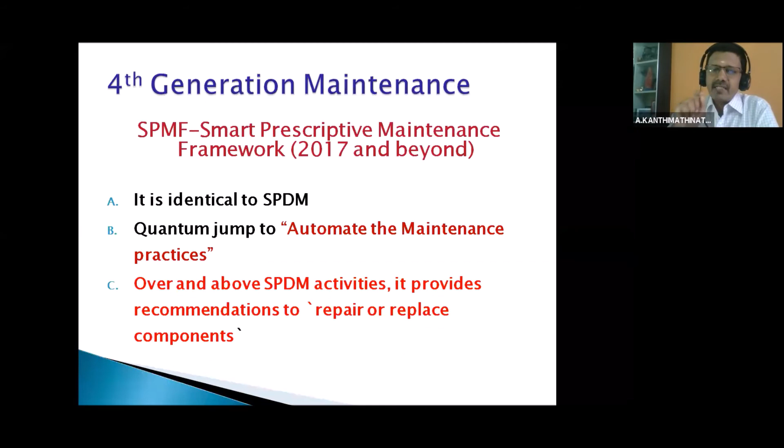It is identical to SPDM. Over and above SPDM, we are trying to automate maintenance practices. It provides recommendations to repair or replace components. The purpose is to improve machine learning.

It collects data on failures of the machines and their causes from the cloud data, and pools actions to correct such failures, then transforms this into recommendations to users globally. The platform used is artificial intelligence.

Prescriptive maintenance is a growing technology at a faster pace, utilizing artificial intelligence, IoT, cloud data, analytics, and machine learning. The information gathered from real-time data from the sensor will be utilized to prescribe corrective actions and pass instructions.

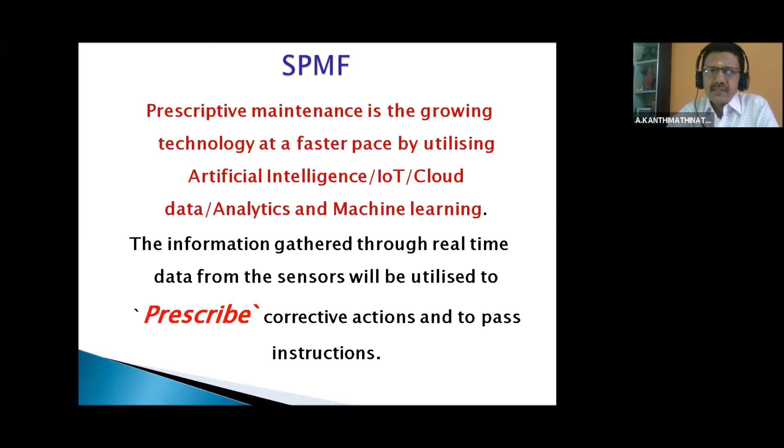SPMF can alternatively be called an automated maintenance process. What are the inputs into the SPMF? The most critical KPIs of the system.

If you take the example of autoconers, what are the KPIs of autoconers? Misplacing percentage, drums with more clear records, and so on. So there's a knowledge bank, a history of failures and the corrective actions taken by us.

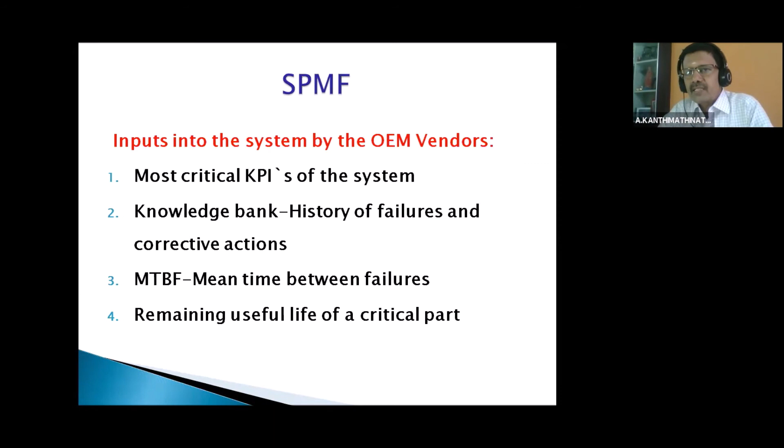MTBF, mean time between failures - what is the time taken for the mean time between failures? What is the remaining useful life of a critical component? For example, what is the useful life of a splice gasket, and so on.

The best tool for SPMF today is the Visual Manager System as supplied by Muratec. It collects KPIs like failure of operand sensor, MUP percentage, MSL misplacing percentage, number of missed auto doffing, NADM, MLC clearer malfunction, etc. There are so many parameters, and it also benchmarks autoconer performance based on cloud data available elsewhere from user data. Then it also gives a recommendation on the part to be replaced.

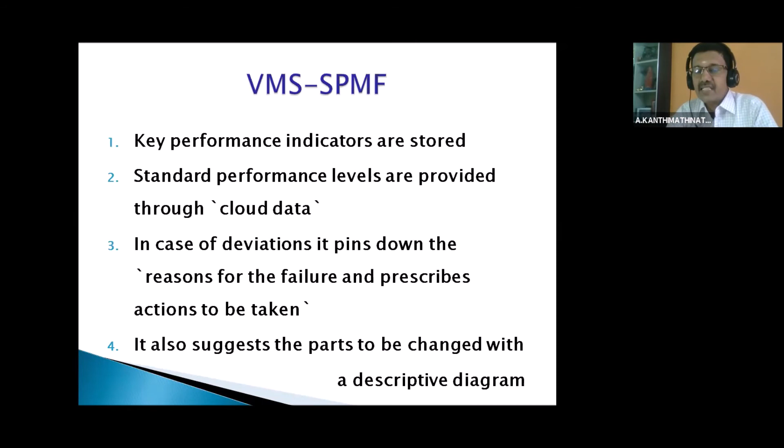In the VMS, they are also storing the key performance indicators. Standard performance levels for each performance characteristic are stored based on cloud data. In case of deviation, it pins down the reasons for failure and also prescribes the actions to be taken, whether to replace or repair. It also suggests the parts to be changed with a descriptive diagram, which is more important.

Visual Manager in Autoconer clearly identifies the rogue drums where critical performance metric deviations are more. Maintenance crew need not stop the machine unnecessarily for checking the splices or drum setting. Elimination of routine machine cleaning or routine maintenance is achieved.

What is available in the VMS? Key performance metrics, content of the problem, checkpoints - which point to be checked, what are the consumable parts, how to replace the parts. It is training us to do the job. A periodical health report is also given.

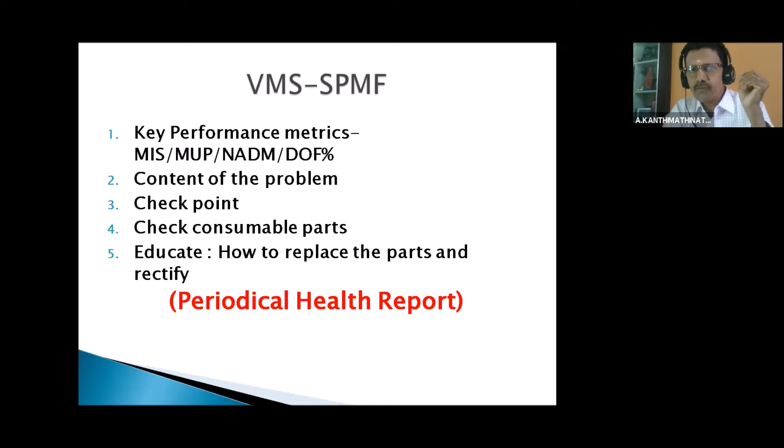It's a display of this program. I think the slide is visible to all of you. Content of the problem is explained as tension break increase due to abnormal tension force. This is the content of the problem.

What is the checkpoint? Check the movement of the tensor finger by hand. This is the checkpoint. Check the consumable parts. What are the check parts, consuming parts? Bearing. If the bearing is damaged, it should be replaced.

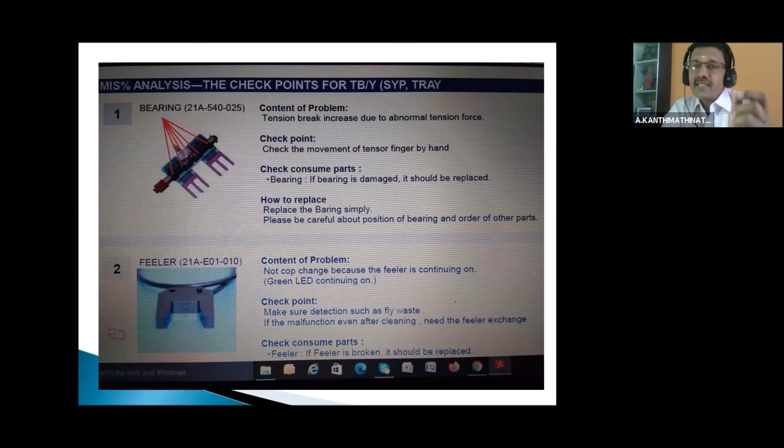Then how to replace? Replace the bearing simply. Please be careful about the position of the bearing and the order of the other parts. This is given in a descriptive diagram. The next slide shows the diagram also.

This framework covers performance of real-time data, benchmark performance standards based on cloud data, machine learning, fault history and tribal knowledge, IoT enablers, and FMECA - that's failure mode effect analysis, failure mode and effect criticality analysis. Since this maintenance works on this framework, we call it Smart Prescriptive Maintenance Framework - SPMF.

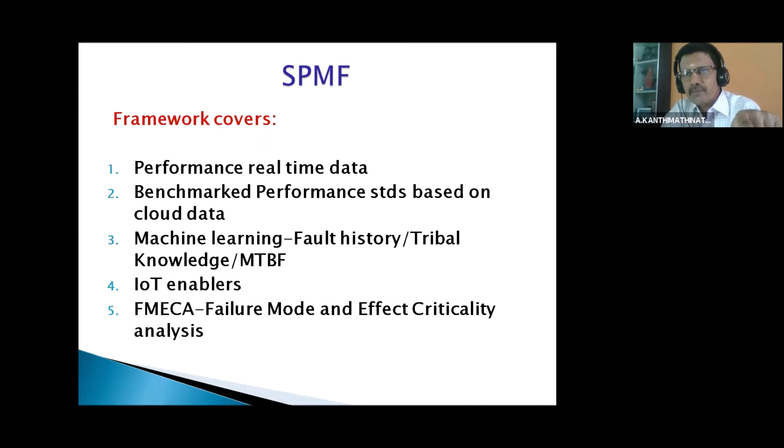What is suggested? Based on this program, I would like to suggest some goals for smart spinners. Smart spinners should work towards maximum automation in their new projects or in existing mills wherever possible, with less human intervention. We should work towards systems where we can build quality into the product through ZDQC and FMEA.

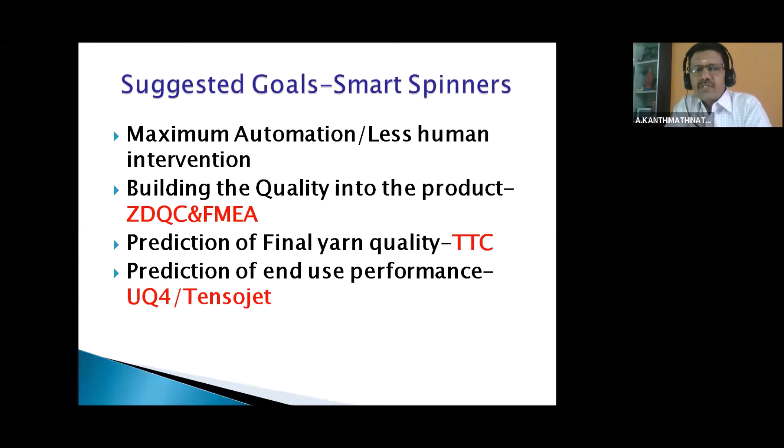And we should be able to predict quality finally with systems like TTC, and predict end-use performance with the help of UQ4 or Tensojet. We should also try to go in for new machines where automated waste controls are established, like Trützschler cards, and Lakshmi cards being supplied with automated waste controls.

And we should go with modern clearers with the smart clearing curve. For real-time data, we should try to go in for production monitoring systems, individual spindle monitoring systems, VMS, mill masters, Spin Connect, Smart Dragon, and finally go in for SPDM and SPMF for automated maintenance systems.

Smart spinners can adopt what is best suited for the present condition of their mills and move ahead towards SPMF and SPDM for all critical assets of their organization.

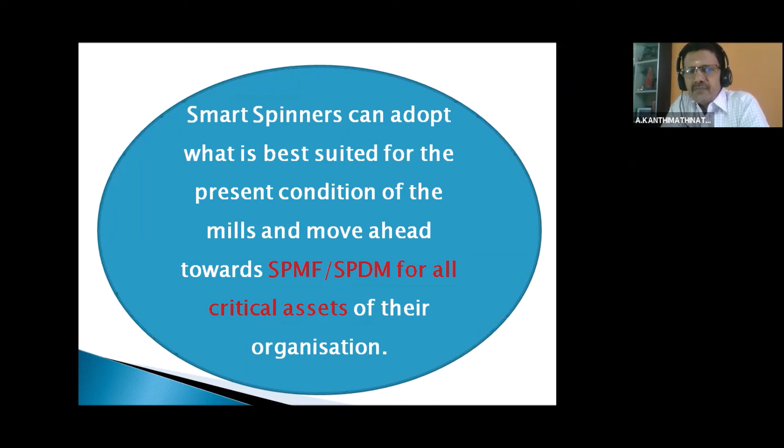This was an analysis on maintenance, and I hope it will be very much useful to all the participants. I think they would have noted it down, and I expect many more questions on this.